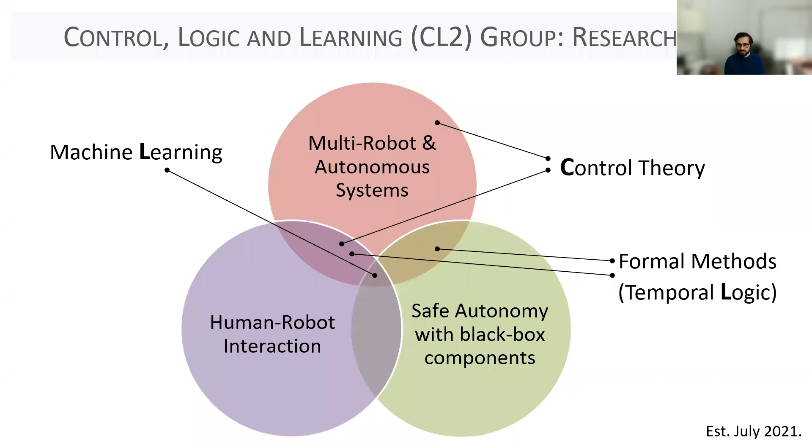That's another theme. As the name of the group suggests, the main tools that we use are control theory, a little bit of machine learning, and elements of formal methods, mostly temporal logics, which is going to be the focus of today's talk.

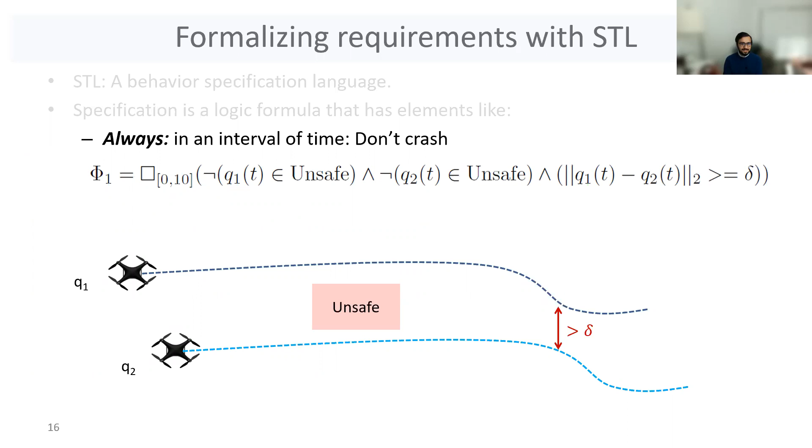Another one is the eventually operator, which says that an event should happen at least once in a given time interval. We can use that to encode requirements like these two drones having to reach a goal set within a bounded amount of time. So here I'd write phi2 as eventually over 10 seconds—again, the time interval could be anything, I've just used 0 to 10 as an example—I want quadrotor 1 to be inside the goal set, and similarly I also want quadrotor 2 to be inside the goal set within 10 seconds.

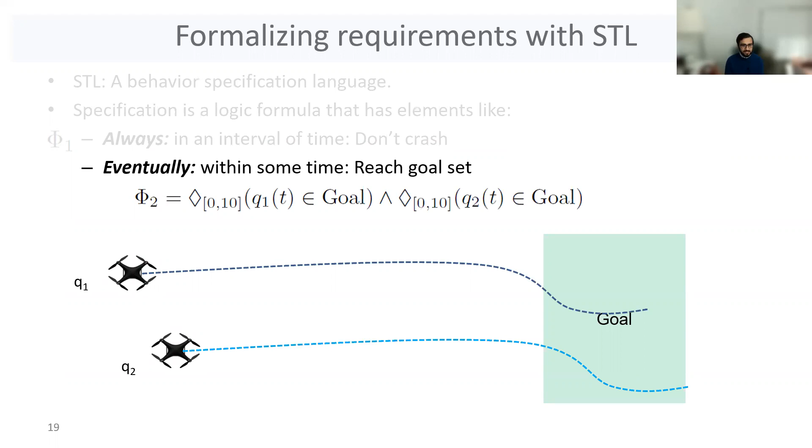We can also have if-then type reactive requirements in signal temporal logic. One example here is: eventually, I want quadrotor 1 being inside the goal set to imply that it's dropped package P1. Similarly for the second quadrotor.

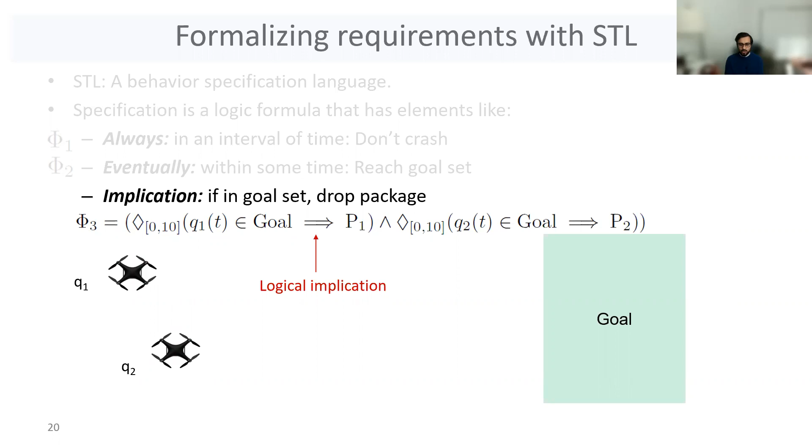We can combine these specifications together by either nesting them or using disjunctions or conjunctions. In this case, I just connect them using the logical AND, and come up with a two-drone package delivery problem, or a simplified representation of that. Here, all the temporal operators had a range of 0 to 10 seconds, so for this case we can say we have a specification horizon of 10 seconds—that is, I need trajectories of length 10 seconds before I can say whether or not the specification was satisfied. In the rest of this work, we'll only deal with problems or specifications that have a bounded horizon.

STL, of course, also works with unbounded operators, but that won't be the focus of this work.

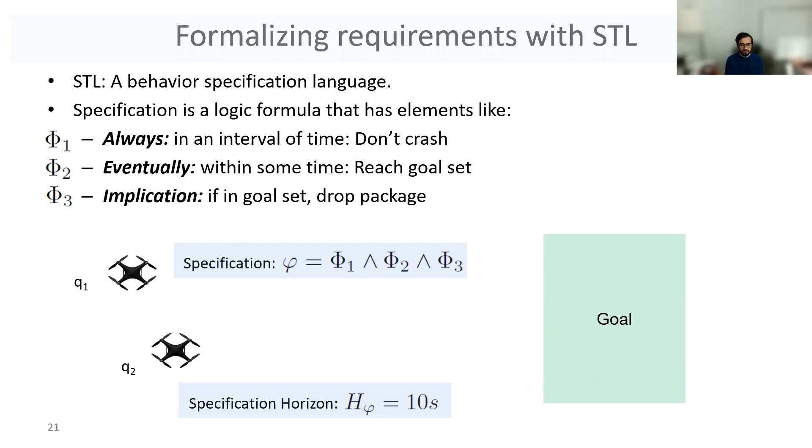So with that, we can move on to what the planning problem is. We've talked about formalizing mission requirements using signal temporal logic. Now the problem is, how do I generate trajectories that satisfy this specification?

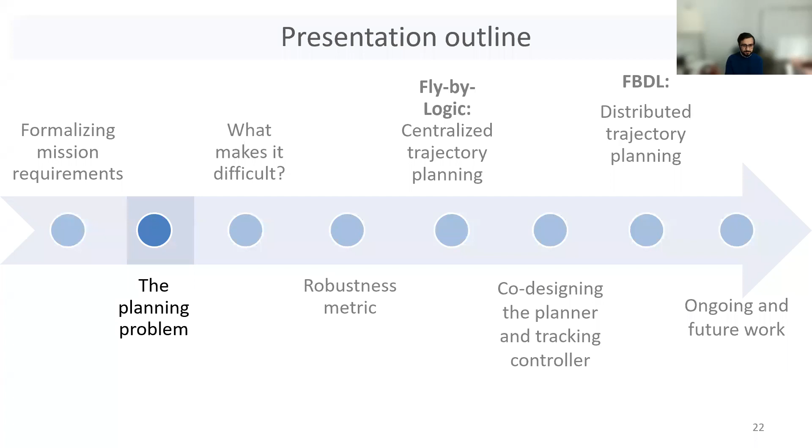A little more formally, an STL specification is a logical valued formula that takes in my trajectories over all my unmanned aerial vehicles, or all my drones, and maps it to a single Boolean true or false value. True if all parts of the specification are satisfied, otherwise it's false.

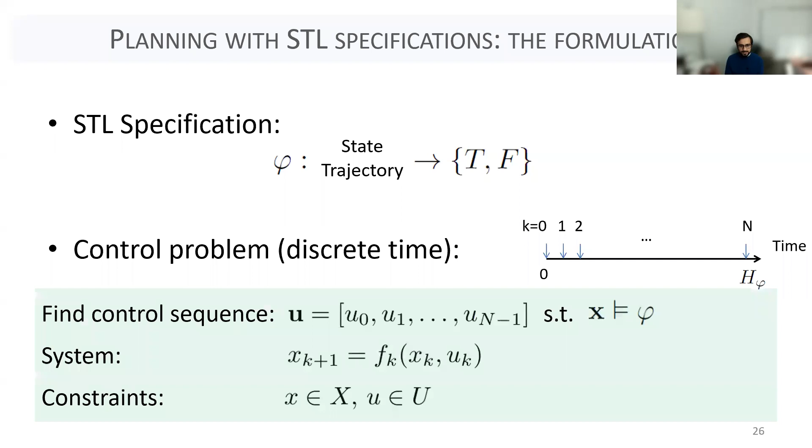The motion planning problem can be thought of as a finite horizon discrete time control problem, where I take my specification horizon and discretize it. Let's say for these 10 seconds in the previous example, I discretize them at 10 Hertz, so I have 100 time steps. Our problem then is to find a sequence of controls, or decision variables, for each of these agents such that they satisfy the specification.

So that's what this notation in the box is trying to say. Of course, we haven't formalized how, so that's going to be one of the main things we'll discuss in the rest of this talk. And we want to do this subject to system dynamics and constraints on the system, like bounds on velocity, acceleration, or the thrust that can be applied to these robots.

So again, given an STL specification, this is a high-level overview of the type of problem we want to solve in order to generate these trajectories that satisfy the specification.

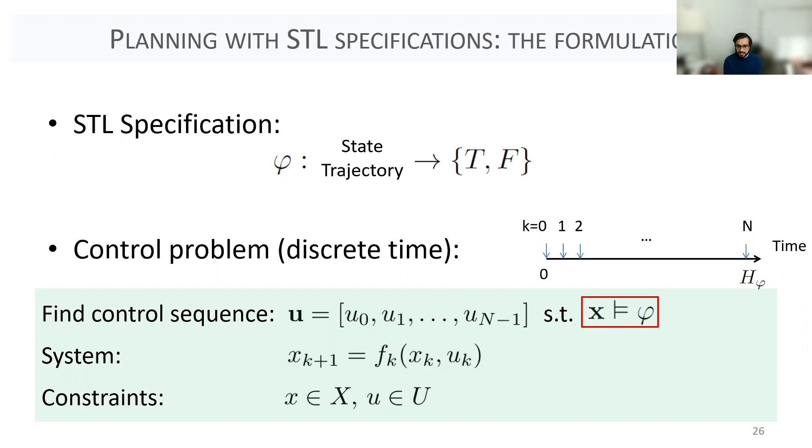Of course, we're not the first people to have thought of solving this problem. There's a lot of work that's already been done on it before I even got into the area. So I'll take a very coarse-grained look at some of the related work to see why this is a challenging problem. Disclaimer: this is a very coarse and slightly outdated view of the related work.

The most popular class of methods for control or motion planning with signal temporal logic specifications is to cast the problem into a mixed integer convex form. The idea is to introduce binary variables for atomic propositions, corresponding to events such as a state being inside a given set or not, and then come up with a mixed integer linear set of constraints such that satisfying those constraints also means you've satisfied the specification.

Two of the papers cited here have pretty much automatic ways of going from a specification to a mixed integer linear program. These approaches, being mixed integer linear programs, are double exponential in the complexity of the formula, so they do not scale very nicely. They also produce what we can call zero robustness solutions.

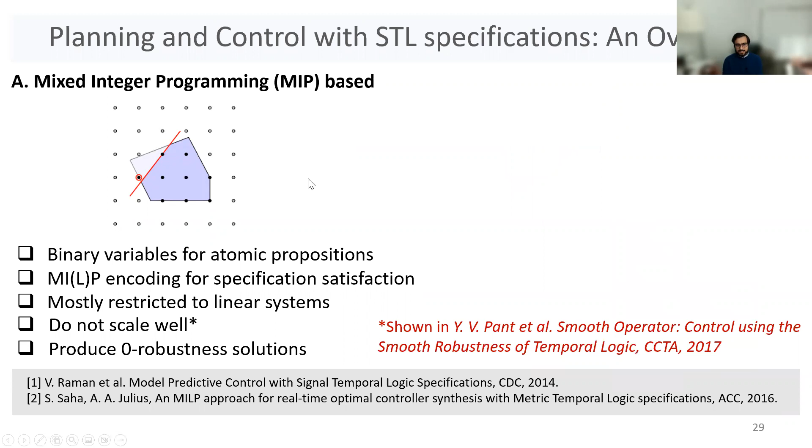The other approach mostly comes from the linear temporal logic side of things, but can also be applied to certain classes of discrete time signal temporal logic specifications. The idea is, instead of dealing with continuous dynamics like in the mixed integer programming approach, you abstract your dynamics on the workspace. Then, based on that discrete abstraction, you essentially turn the problem into one of doing a graph search.

The type of dynamics that can work with this are either simplistic, or you lose a lot, or you come up with plans that are very jagged and need smoothing on top of that. When it comes to signal temporal logic, the type of formula you can solve the problem for using these approaches is usually a restricted fragment. And these approaches also do not scale well, especially when you add more agents or a third dimension in the workspace, like we have for aerial robots.

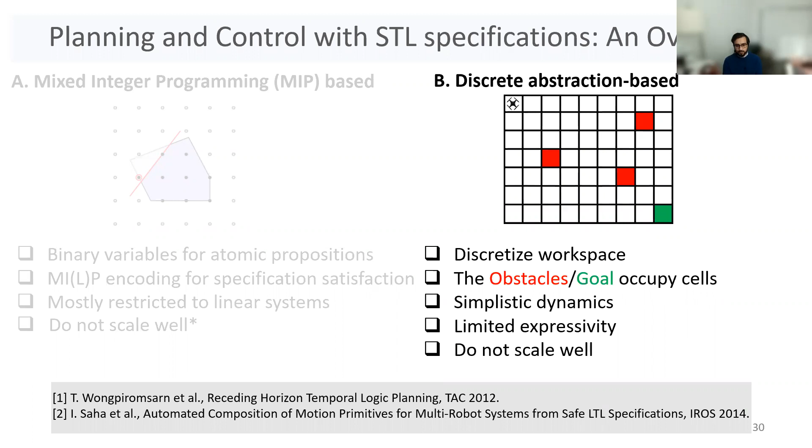So, the problem with most of these approaches is that they're combinatorial and do not scale very well, which is one of the main challenges we try to overcome with this work.

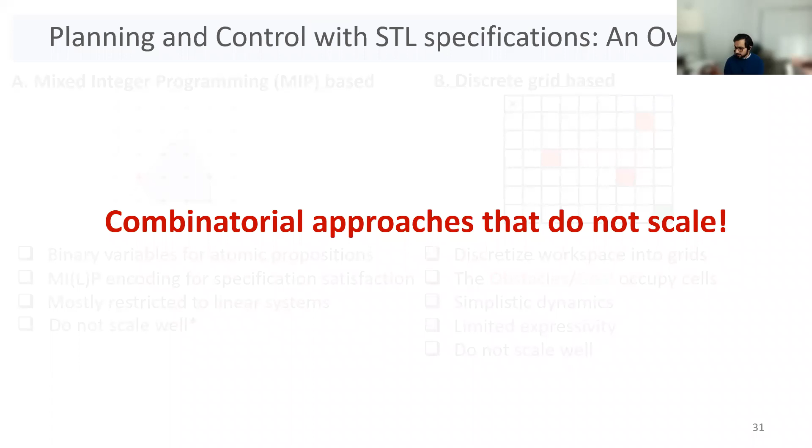I should also mention there are other methods I'm not going to talk about or compare with. For example, you can use reinforcement learning to solve this problem, turning satisfaction of an STL specification into essentially learning a policy via Q-learning. There are also approaches that turn this into a purely convex optimization problem, but a lot of the heavy lifting is done via projections of convex sets, which again do not scale nicely. There are also great approaches based on control barrier functions, but they rely on handcrafted barrier functions to some extent and are also restricted to certain fragments of signal temporal logic.

So, to overcome some of these limitations, our approach is that we want to go from solving a combinatorial problem—that is, we don't want to solve a mixed integer program or do a graph search—to solving a continuous problem. In fact, we want to use gradient-based optimizers to solve this problem.

And in order to do that, we'll introduce the robustness metric associated with STL specifications. The robustness of an STL specification was introduced by Georgios Fainekos and George Pappas in 2009. While an STL specification, phi in this case, takes in a state trajectory and gives you a Boolean outcome, true or false, the robust semantics of STL give you a continuous function rho of phi associated with your specification phi, which again takes in the same input—your state trajectory over all agents—but now instead of mapping it to a Boolean true or false, this mapping goes to the extended real line, so you have a continuous valued output.

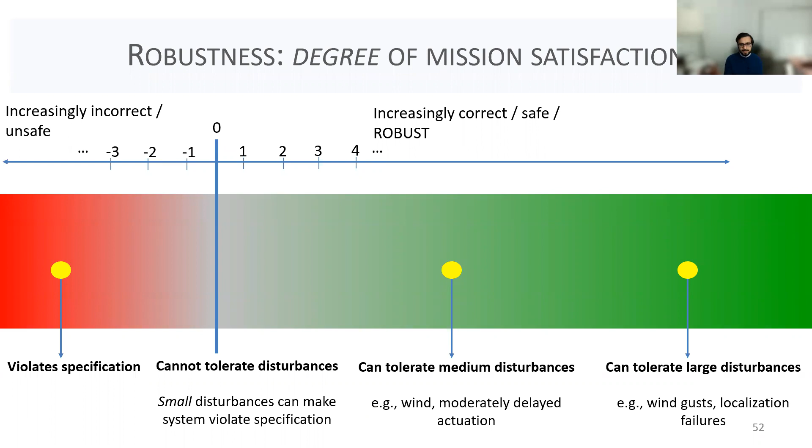So let's take a quick look at how we can build up this robustness function through one example. I won't go through the full recursive grammar of building it up. We'll take an example of a safety specification where I have a robot with position Q1, and what I want is that always, within 10 seconds, I don't want the robot to be inside the unsafe set U1 or inside the unsafe set U2. Let's say I'm given a trajectory of the robot like this for which I want to evaluate robustness.

So in this case, the robustness function essentially takes the following form: it's the minimum over time of the negative max of a signed distance metric that tells me how far away Q1, the position of the robot, is from the unsafe set U1 and the unsafe set U2.

The sign distance metric is such that if Q1 is inside the unsafe set, it will take on a positive value. Otherwise, it'll take on a negative value. Corresponding to the negation in the formula, we also have a minus sign in front of the max.

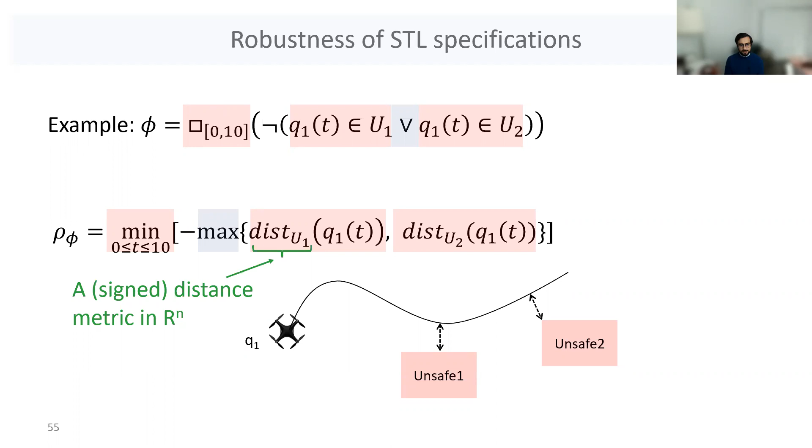In general, for a discrete time STL specification, where time is not in a continuous interval but over samples, the robustness function consists of the discrete minimum, the discrete maximum, and a distance metric. That's all you need to compute a robustness function.

In general, we can build such a function for any STL specification, and we can do it automatically using rules that I'm not going to talk about here today in the interest of time.

It also has the nice interpretation that, for example, for this trajectory, the robustness takes on a value R, which is greater than 0. That means that I can draw a tube of radius R, and the tube inherits the shape from whatever distance metric we use around this nominal trajectory.

All trajectories that remain inside this tube of radius R will satisfy the specification. In fact, this tube is more conservative—you could also have trajectories that go outside the tube and still satisfy it. But any trajectory that remains inside this tube is also going to satisfy this particular specification.

So just to summarize, what we have now is a robustness metric associated with the STL specification. It has a continuous valued output, and can be built automatically following the grammar of STL.

This leaves us with a very intuitive form of doing motion planning or control with STL robustness, which is: let's just maximize this robustness function, because we know if it takes on positive values, it means you've satisfied the underlying specification. In fact, that is what we do—we maximize robustness, but we had to jump through a few technical hurdles to do that first.

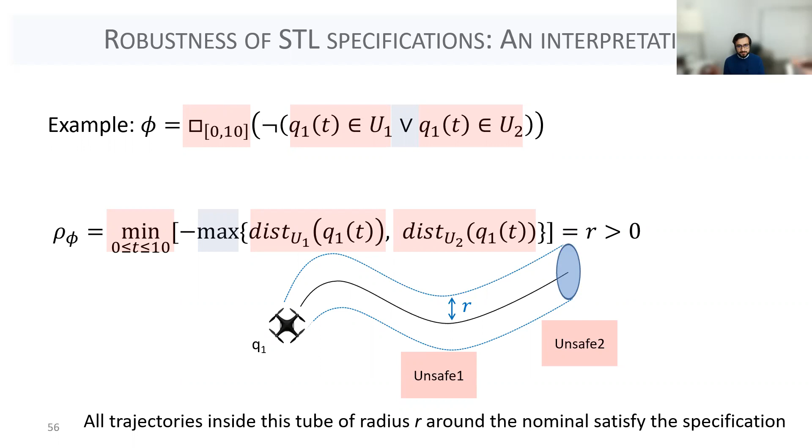So there is a minimum—why is the distance a positive value? Well, no, this is signed distance, I should make that clear. It's a signed distance, so it gets negative when you're outside the set, and positive otherwise. Okay, got it now. Yeah, okay, so it's—okay, thank you.

Yeah, and I should also mention we're looking at discrete time STL specifications. So even though my notation has a continuous minimum, it's really a discrete minimum over samples in time from 0 to 10 seconds. And yeah, the distance is actually a signed distance.

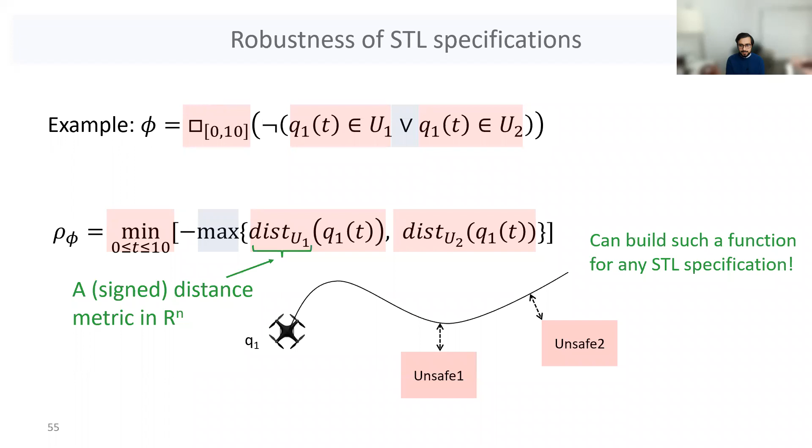In fact, we even look at something much simpler. Instead of looking at an actual distance metric, we just break down our sets into axis-aligned polyhedrons and look at half spaces—so we look at distance to a plane rather than signed distance. But I think that's a technicality that maybe doesn't matter too much here. Thank you for the question.

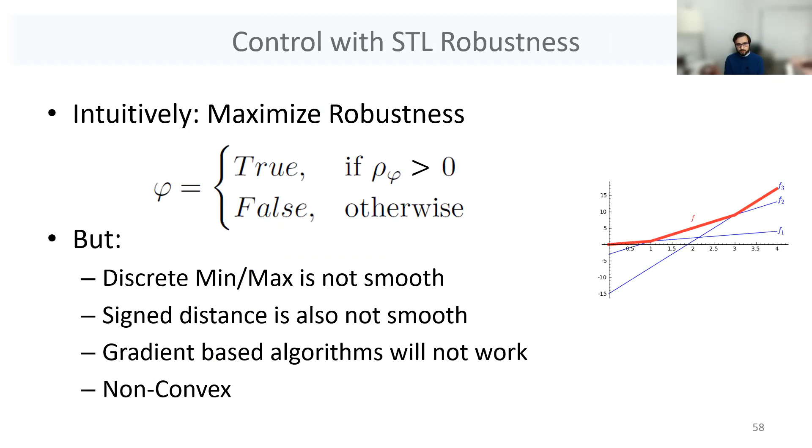So we have this robustness function, and a smooth approximation of it which we can maximize through gradient-based methods. That is what we do in our method called flyby logic, which generates trajectories for multi-agent systems in a centralized manner. Flyby logic is a predictive optimization-based motion planning algorithm.

It's essentially an optimization for maximizing smooth robustness through waypoint selection, where smooth robustness is denoted by rho tilde of phi. Smooth robustness has the property that if I plug in my trajectories into that function and it takes on a positive value greater than some epsilon, it means the underlying specification phi is satisfied.

My optimization is going to be only looking at some coarse-grained waypoints to be selected. So the optimization isn't going to be over low-level controls or over continuous trajectories. It will only be over waypoints.

Through this optimization, we ensure that we aim to get two guarantees. One is continuous time satisfaction of the specifications. So even though we deal with these waypoints, which are orders of seconds apart in time, we still want continuous time satisfaction of whatever's happening between these particular waypoints. We also show kinematic feasibility of the resulting trajectories.

I'll set up this problem. I'll mostly talk about it in the context of a single agent, but if I have multiple robots, I just have copies of the variables and constraints I'm going to talk about now. We start off with, say, some given initial positions and the workspace that you'll be operating in on the map.

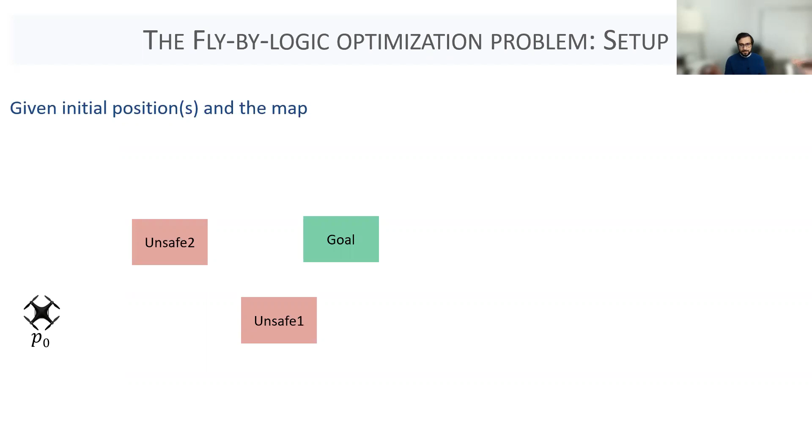The optimization variables for this flyby logic are going to be N+1 waypoints per UAV. These waypoints, P0, P1, P2, and P3, are in R3, so they're position waypoints, and they're uniformly apart in time. That is, it takes my robot TF seconds to go from P0 to P1, from P1 to P2, again TF seconds, and so on. You can think of TF as, for example, being 1 second if you want to put a number to it.

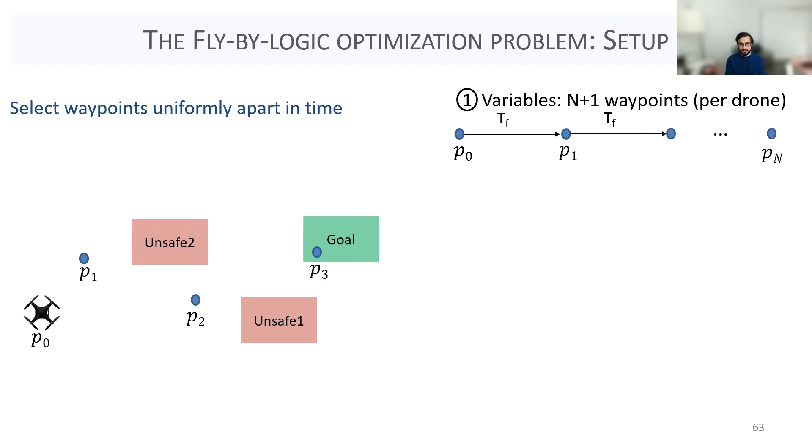Now, I have a specification horizon, let's say of H. So even though capital N is a design choice, I should pick at least enough waypoints N such that the total flight time is greater than the specification's horizon, so that I can generate a trajectory of enough duration to be able to evaluate the specification. That's one design consideration I should be aware of.

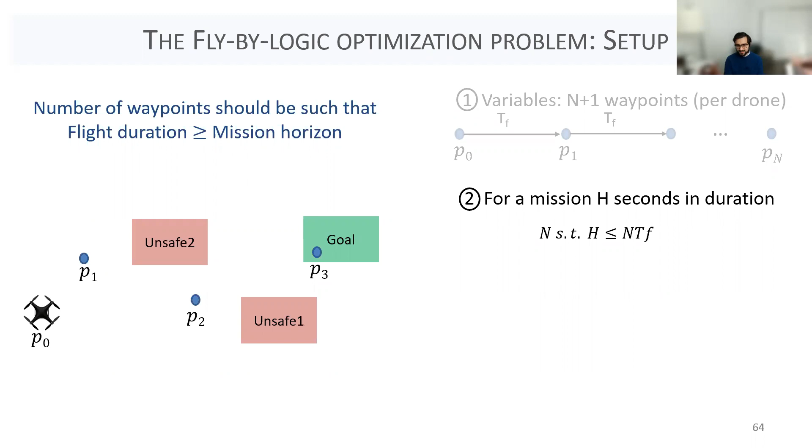Now, just reasoning about these waypoints alone is of course not enough. We are talking about satisfying an STL specification, and we want to do that for these trajectories that connect these waypoints. So in order to do that, we're going to restrict the ways in which we can connect these waypoints successively, by connecting them via jerk minimizing splines.

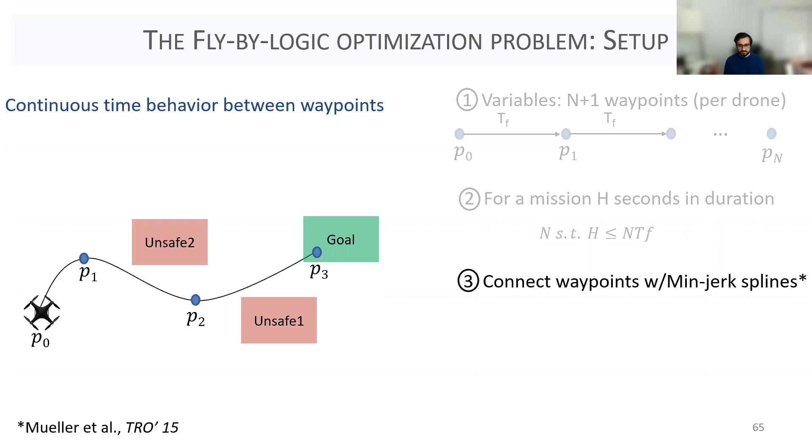For multi-rotor aerial robots, these jerk minimizing splines have a very nice closed form expression. If I'm connecting a waypoint P0 with a waypoint PF, my jerk minimizing spline Q star, in each dimension XYZ of my workspace, has the following form for position, velocity, and acceleration. You can see it's going to be a quintic spline in position, and then derivatives of that for velocity and acceleration. These parameters, alpha, beta, and gamma, turn out to be nice and linear in my variables of interest.

So my variables of interest are P0, let's say a waypoint that the robot is at, the next waypoint PF, the initial velocity of the robot V0, and maybe the initial and final acceleration. In this particular case, we restrict ourselves to trajectories that have a zero acceleration at the waypoint, so we don't worry about these particular acceleration terms.

But long story short, what connecting the waypoints via jerk minimizing splines does for us is that we have these continuous time trajectories connecting the waypoints as nice linear functions of my variables of interest, parameterized by time, since they're quintic splines in T for position. Similarly, for velocity and acceleration, they're also linear functions of my variables of interest.

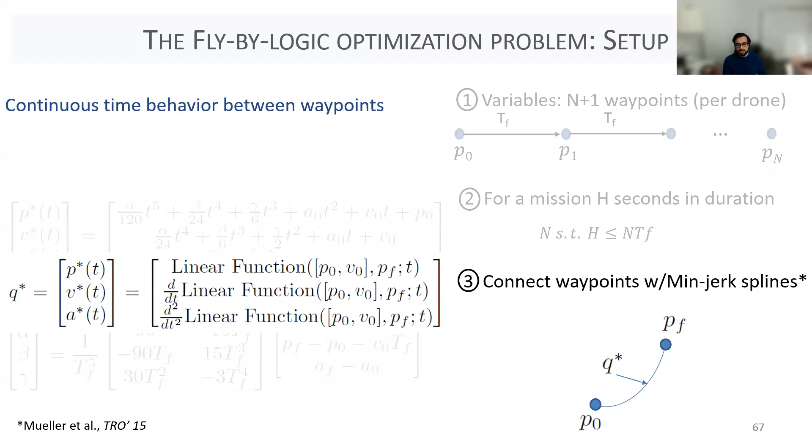Now, I want to throw this to an optimizer. Having a continuous trajectory, while it's great for evaluation, is not good for optimization. So what we're going to do next is discretize our continuous trajectories at some high rate.

If TF was 1 second, you can think of dt as being 1/20 seconds, or getting samples at 20 hertz. So if I have a continuous spline connecting P0 to P1, I'll have 20 samples between that. Similarly, I'll have 20 discrete samples between P1 and P2, and so on.

Leveraging the fact that minimum jerk splines have a nice closed form expression, I now have a closed form expression for each of these samples shown by the red stars, these discrete points along the trajectory. They're nice linear known functions of the preceding and succeeding waypoint, parameterized by which sample they are along the trajectory. So if I have a sample star subscript I between P1 and P2, it's purely a linear function of P1 and P2, and which sample it is, whether it's the third or fifth sample along this trajectory.

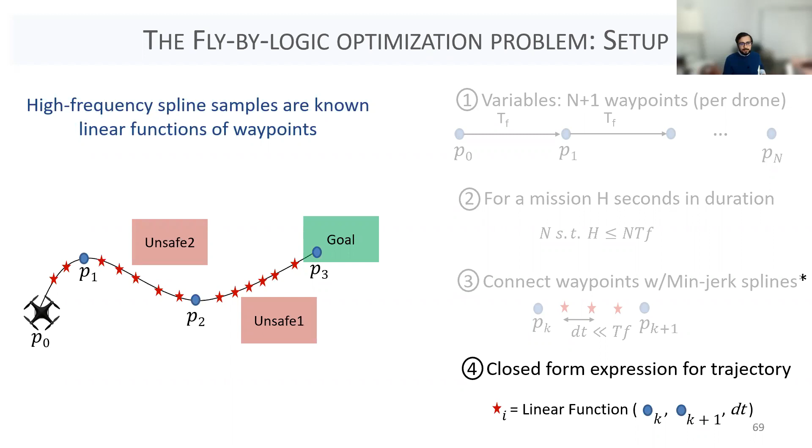Through this construction, optimization variables remain very few. We have position waypoints, P0, P1, and so on, for each of my capital D UAVs. And then I have a nice linear representation of the jerk minimizing spline trajectory connecting these, discretized at a high rate. So we've essentially represented the entire trajectory at a high rate using very few variables. This allows me, if I move my waypoints around, to know through my closed form linear function how the resulting trajectory connecting these in discrete time is also going to move around. That's one of the key constructions we use in the optimization for Fly-by-Logic.

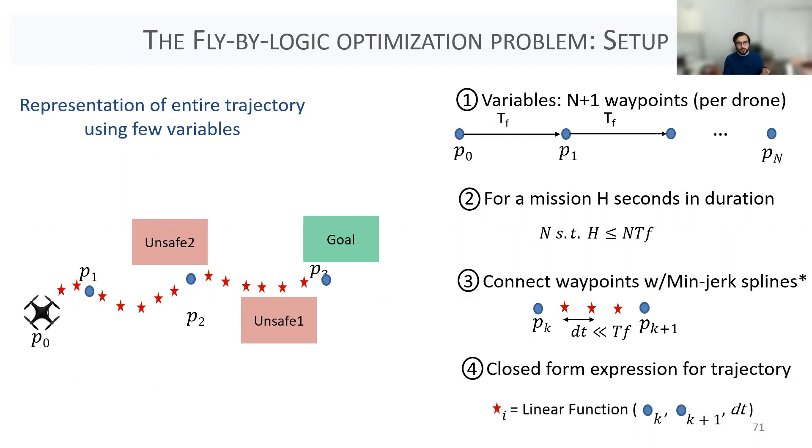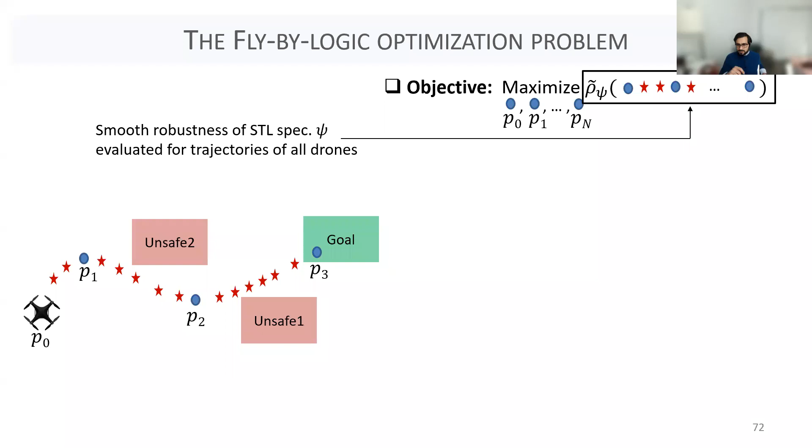So now we can talk about the optimization itself. The optimization is that we want to maximize the smooth robustness of an STL specification, where the smooth robustness is a continuously differentiable function of these samples of the trajectory that I have. I want to maximize that along the full trajectory, not just the waypoints, but the waypoints and the red stars, the higher frequency samples along the jerk minimizing splines, over my optimization variables, which are these capital N waypoints for each of the drones.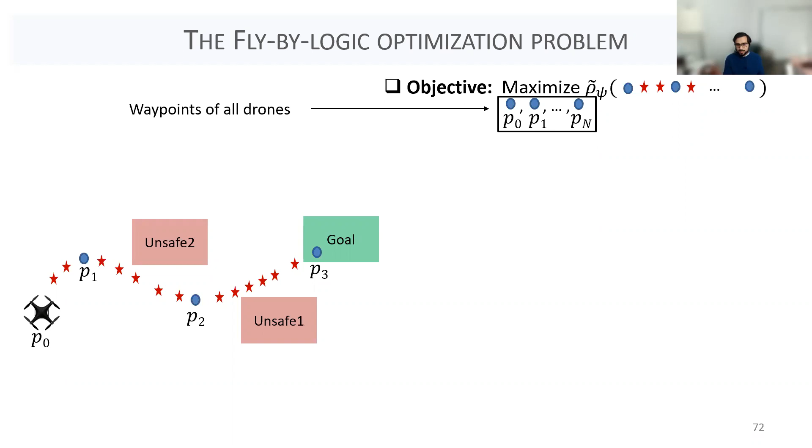I'm writing this down just for a single drone to keep the indexing simple. But if I had capital D drones, I would have capital D copies of these waypoints, and similarly the trajectory would also be longer, would have more elements to it. So that's the objective over here.

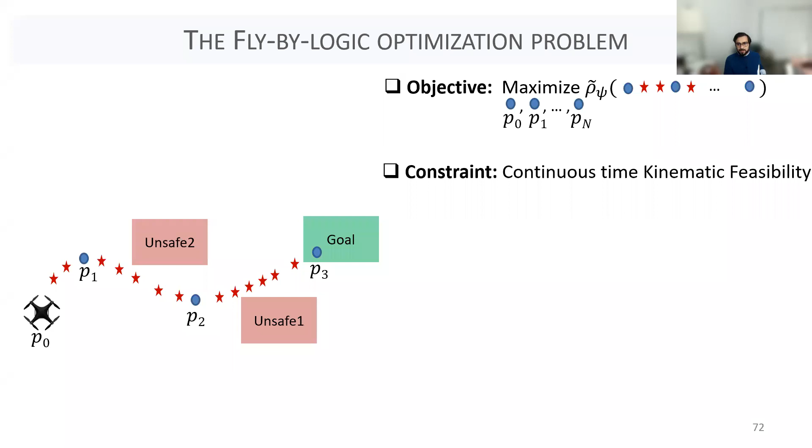The constraints are that we want to do this subject to continuous time kinematic feasibility. That is, I want to generate trajectories such that their velocities and accelerations are within predefined bounds, so that a low-level controller will be able to track them nicely. And I want this to hold for all times in my specification horizon. The problem here is that if I want to throw this directly to an optimizer, this is an infinite number of constraints.

Even if I go about discretizing it and coming up with a constraint for each of these red stars, that would result in a high number of constraints. It would also be conservative, because I would have to think about what's happening between these samples, think about the Lipschitz constant of my spline, and then subtract that from Vmin and Vmax.

However, it turns out that for this particular problem, we could find constraints purely on my optimization variables, which are waypoints. I could find linear constraints on successive waypoints, as shown here. These functions LB and UB, with the subscript V and A for velocity and acceleration, are linear functions of the velocities with which we were at these particular waypoints. And then I have these nice linear constraints.

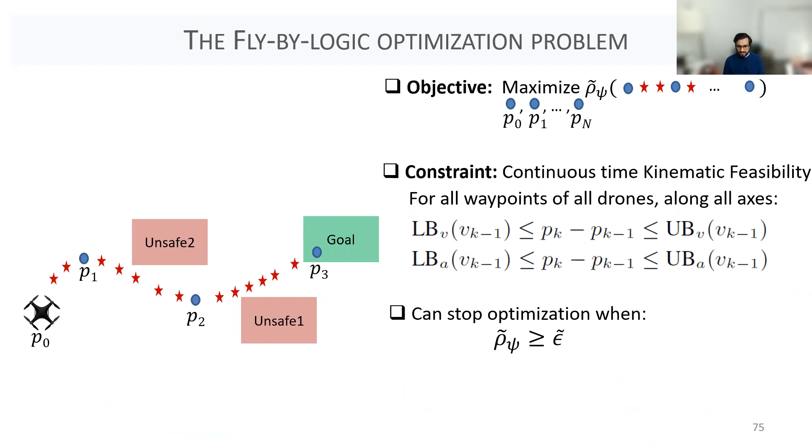With this optimization, we can stop when the objective reaches a particular threshold epsilon tilde, which is a positive value. One of the results in our papers was that we can pick this epsilon tilde such that it ensures continuous time satisfaction of the STL specification. So even though I'm doing robustness maximization on a discrete time trajectory, if the robustness is high enough, it also ensures continuous time satisfaction. It's a simple argument that gives the proof of this corollary.

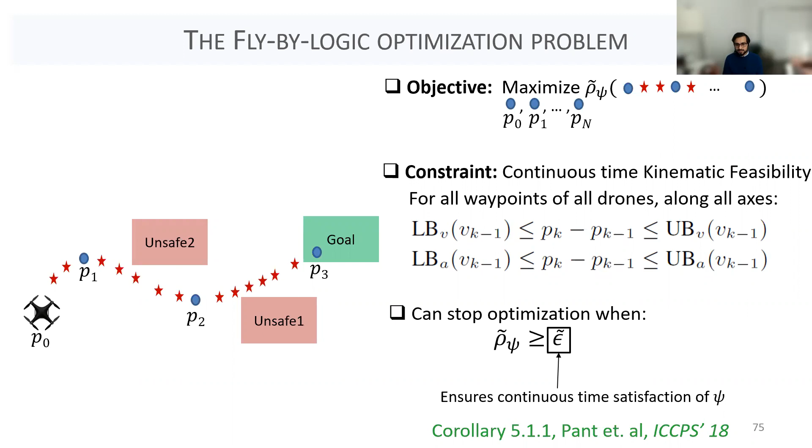One thing to think about is that robustness is in general a non-convex optimization, so that does keep the problem challenging. But what makes it slightly easier is that we have few variables and very few constraints, which are all linear in our variables of interest. So we can throw this to an off-the-shelf gradient-based optimizer.

Putting it all together, if you solve this optimization, we first get the guarantee of continuous time satisfaction of the specification, which is one of the things we set out to get. We also have kinematic feasibility of the resulting trajectories, just by finding a feasible solution to the optimization.

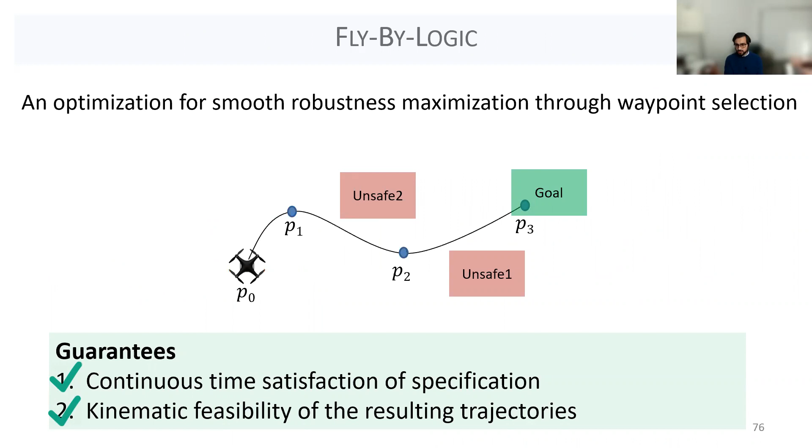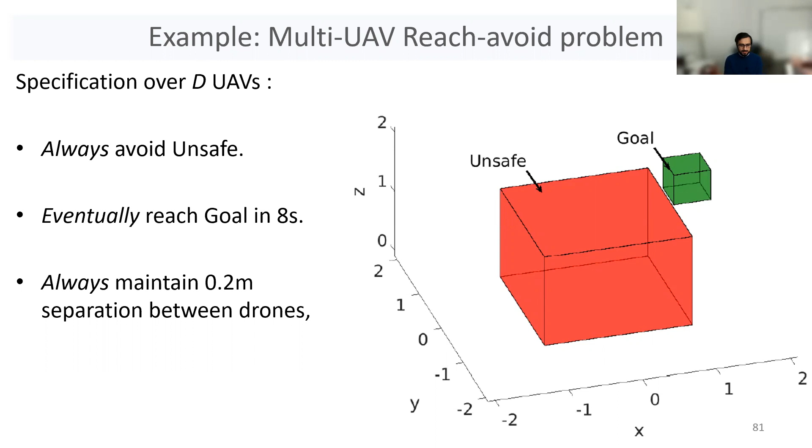With that, we can move on to some experimental results to see how this optimization works. As a first problem, we'll look at a multi-UAV reach-avoid problem, where I have to always avoid an unsafe set. My UAVs, there are capital D of them, have to reach the goal set within a given time interval, which is 0 to 8 seconds in this case. The UAVs should also be at least 0.2 meters apart from each other so they're not crashing into each other. I can write this down as the following STL specification using just the always and the eventually operator.

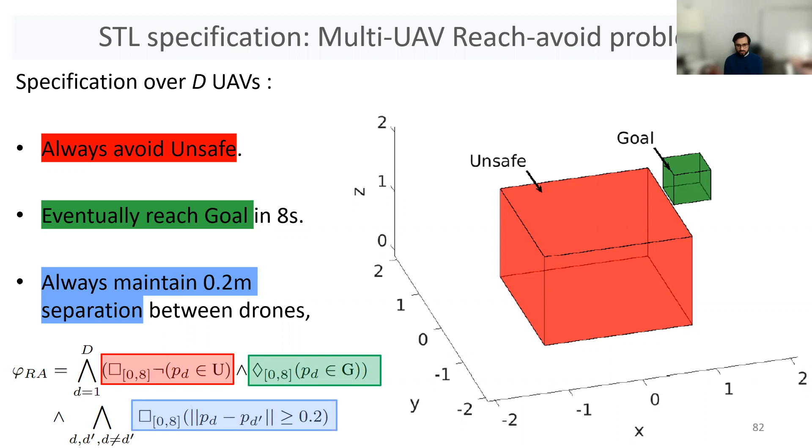And then we can essentially use all the construction in Fly-by-Logic. What we have here is an experiment with 8 Crazyflie quadrotors. I think in this case the horizon of the specification is just 6 seconds.

Through our method, we can generate trajectories where all of the robots make it inside the goal set, then head out, letting the others enter. The fact that they're trying to go as deep inside the set as possible while staying far away from the unsafe set is because they're trying to maximize robustness. So we're not getting these zero robustness trajectories where they just touch the edge of the unsafe set or the edge of the goal set.

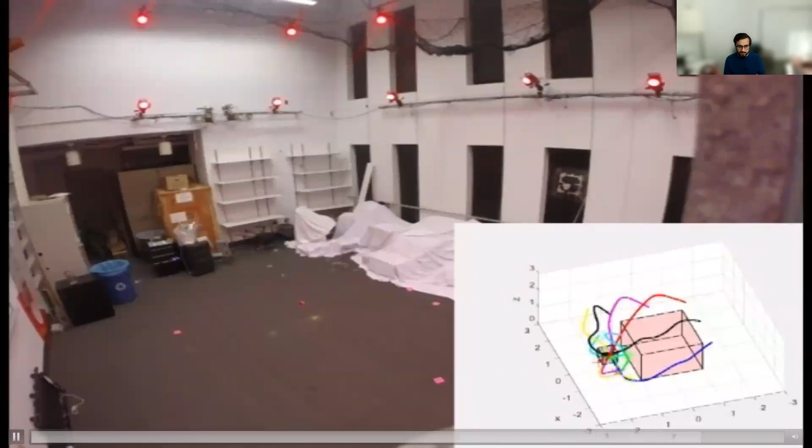One of our main motivations was to come up with a computationally tractable method. So even though it's a non-convex optimization, we see that it scales nicely as you increase the number of drones. The amount of time it takes to find a satisfying solution scales almost linearly with the number of drones. The problem is still, of course, NP-hard, so this is just more of an empirical artifact of the kind of method we have employed.

The mixed integer linear programming based approach, BluSTL, is very fast when you have one drone, but as you start to add more agents, it scales very poorly. It does work for up to 6 drones, but I'm not going to show those results here.

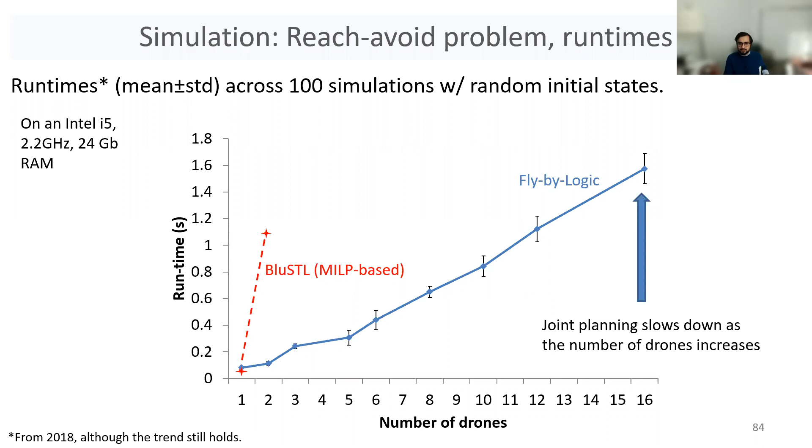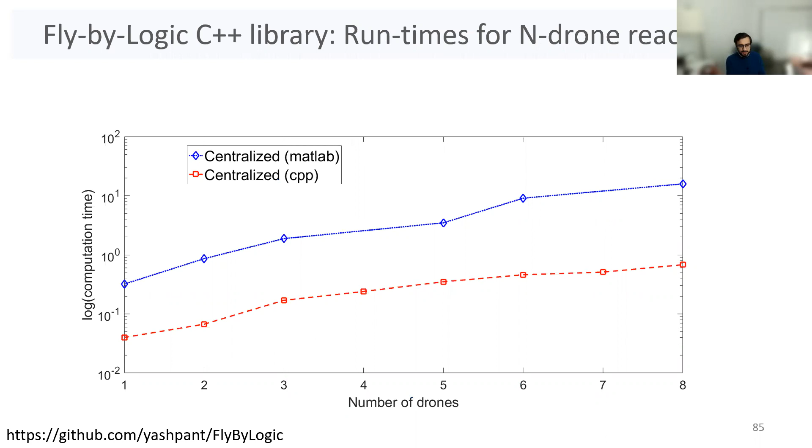One thing we noticed was that as you plan together for all of these agents, you do see a slowdown in compute time. This motivates why we want to do this in a decentralized manner, which we'll talk about later. We also implemented all of this in a C++ library with an easy to use API, the code for which you can find on this link. It's at least one order of magnitude faster than the results in the previous slide.

We're not just limited to reach-avoid problems. We can handle the full grammar of STL. This is one example where we use the until operator in signal temporal logic. Here we do the planning in R2. We have 4 robots shown here, one moving unsafe set shown with the red ellipse, and 5 static unsafe sets, which are these red boxes. These robots have to all reach the goal set without crashing into each other, into the moving obstacle, or the static ones. The additional requirement is that this robot in blue should not get into the goal set until the robot in pink does.

So for something like this, we can throw it to Fly-by-Logic, and it generates the following trajectories. You see that the first 2 robots made it in. The pink robot then makes it into the goal set, which is in green, before the blue robot does. The optimization naturally generates this interesting loiter-like pattern for the blue robot, where it picks these 3 waypoints close to each other and essentially flies a time-wasting pattern while making sure it's staying far away from all the other agents. So again, Fly-by-Logic can handle the full grammar of STL.

One limitation I should point out is that we need to know what the moving obstacle is doing perfectly a priori. Otherwise, we can't apply our method.

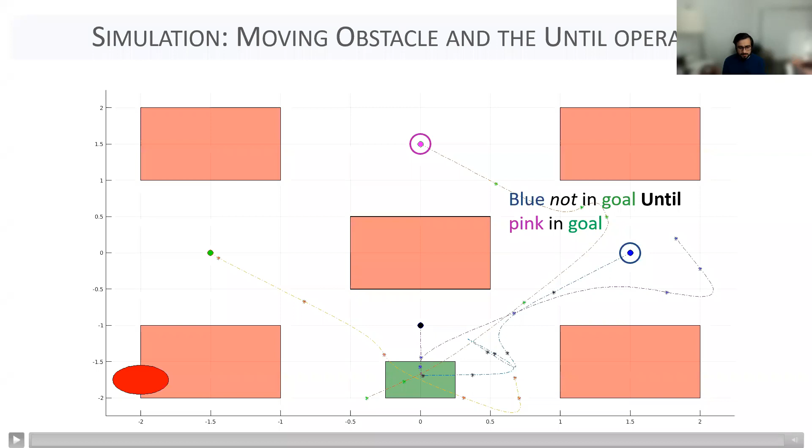So we talked about Fly-by-Logic, which generates trajectories. Next, we want to design the motion planner and a tracking controller so that you can track these trajectories with a bounded tracking error.

This is work that was published in ACC 2021 and was done jointly with folks at the University of California at Berkeley. The idea is that we want to have a co-design architecture where we use Fly-by-Logic as the trajectory planner. It's going to take in the STL spec, the UAV kinematics and the kinematic constraints. It's going to generate trajectories, but it's going to take in an additional input, this dashed line going from a tracking controller that tells you about the worst case tracking error. So the trajectory planner is going to be aware of the worst case tracking error of a controller.

We'll also synthesize a possibly nonlinear feedback controller that accounts for the full nonlinear UAV dynamics and also respects state and input constraints. One more point is we have a proof of bounded tracking error with this as well. So that's the third thing that it's going to do.

The first component is Fly-by-Logic, which we can think of as doing motion planning in the kinematic space, through generating these jerk minimizing trajectories. We're essentially finding a solution with the following kinematic model, where the states are positions, velocities, and accelerations, and the inputs are jerks in the 3-dimensional space, X, Y, Z.

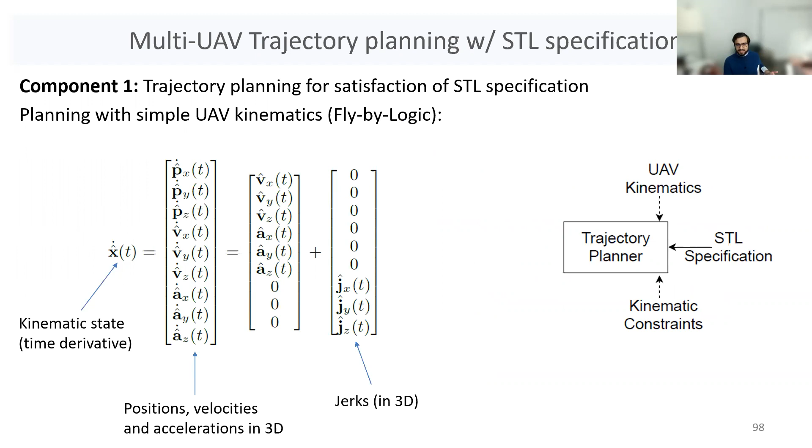The second component is a robust trajectory tracking controller that takes into account nonlinear UAV dynamics. It has 8 states, and it's a nonlinear function with the simplification that we set the yaw and its derivatives to be 0. This controller takes in the UAV kinematics and the UAV dynamics, and uses that to compute the error dynamics, where the error E is the dynamic state X minus a mapping of the kinematic state X hat through this matrix G. For this particular system, the error dynamics E dot turn out to be nonlinear, but they're at least control affine, which allows us to use existing approaches for controller generation.

And we'll synthesize a controller that minimizes the tracking error subject to constraints on the input U.

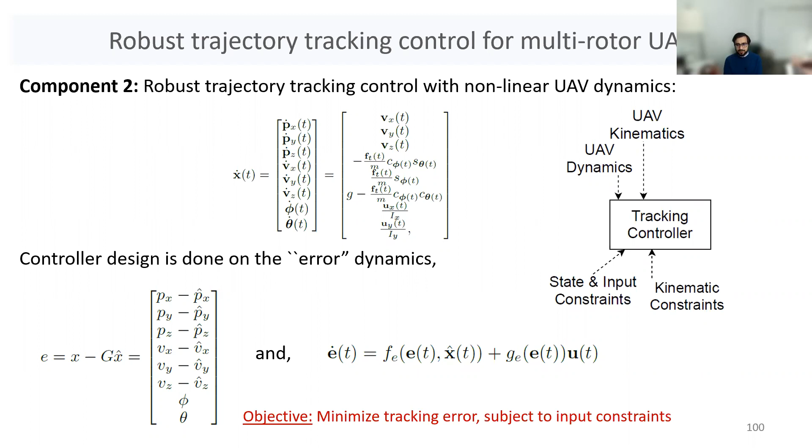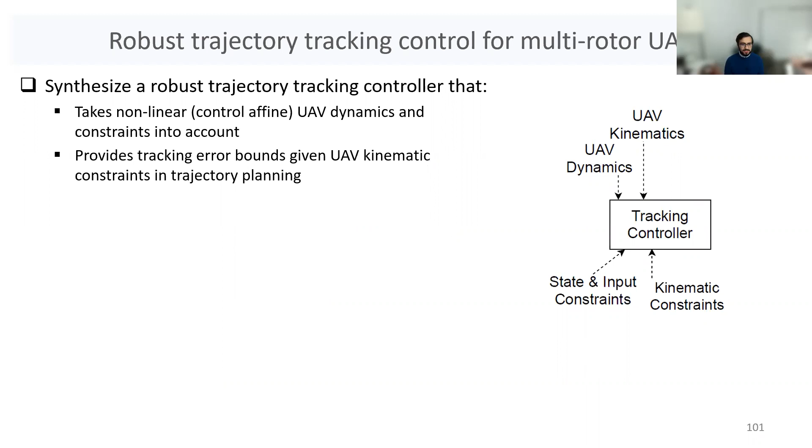The constraints on the state are taken into account by the kinematic constraints anyway, so we don't need to worry about them too much. One of the key contributions of this work is to synthesize this robust controller that can do all of this, and the way we do it is by solving a sum of squares optimization.

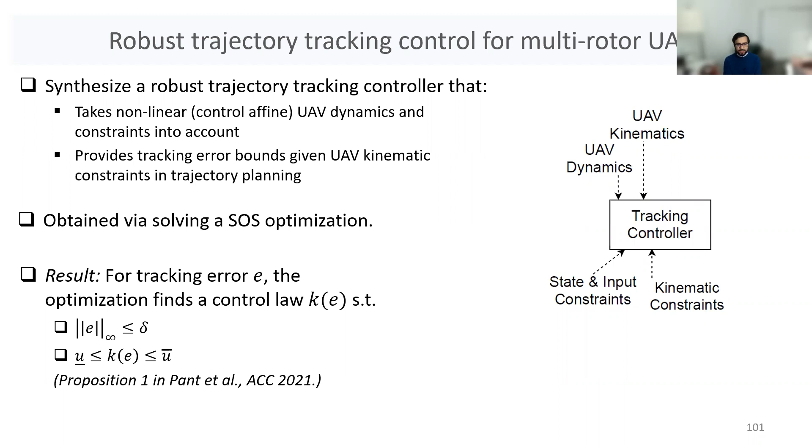I don't have time to get into the details of that, but the guarantees of this construction are that we can find a nonlinear feedback control law K of E, where we have an ellipsoidal bound on the worst case tracking error, which can also be turned into a hyperrectangular, or infinity norm, bound as shown here. It also guarantees that the control value will be within its predefined limits.

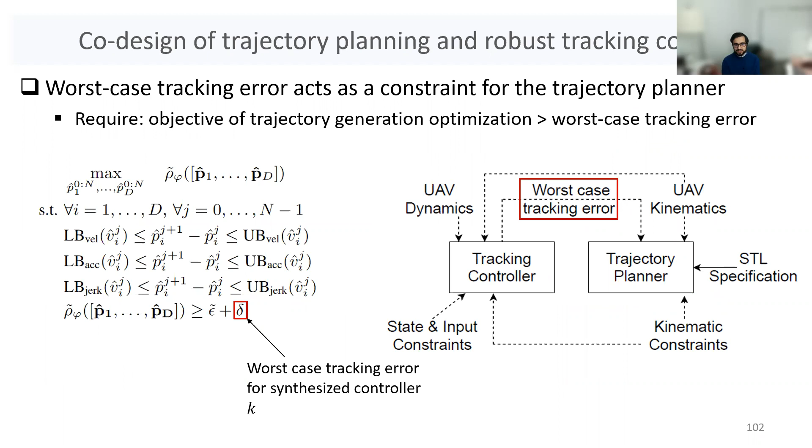This control bound delta can feed in as an input to the Fly-by-Logic optimization, which we slightly modify to also take into account the jerk kinematic constraint, so that the jerk is now also bounded, which we did not have in the previous formulation. We want our smooth robustness value to be greater than a threshold that includes our worst case tracking error. The main result is that if you can solve the non-convex optimization and get a high enough objective value, it means you have satisfied the specification in continuous time.

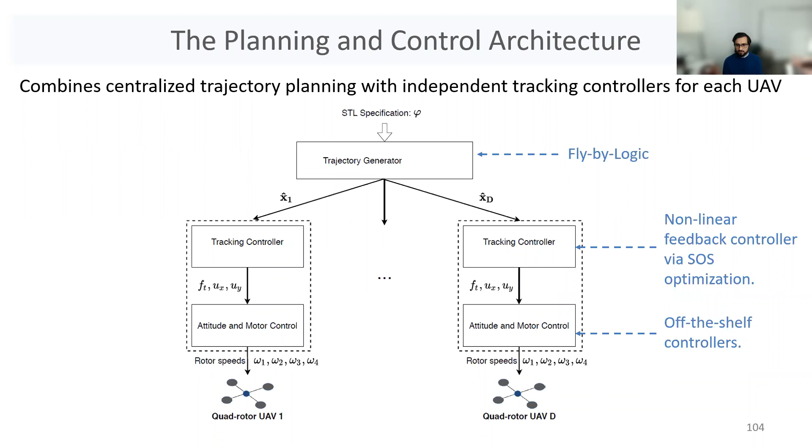And with your controller K of E, you won't have a tracking error that makes you violate either your constraints or your specification. The overall planning and control architecture looks like this: a centralized trajectory generator, a tracking controller which is a nonlinear feedback law via sum of squares, which feeds into an off-the-shelf attitude controller for these UAVs.

I'll go over one case study where we have 4 UAVs, think of them as doing 2 missions each, in teams of 2. UAVs 1 and 2 have to cycle between zones 1 and 2 every 5 seconds.

UAVs 3 and 4 should visit a delivery region, shown in green, for the first 10 seconds, then go to the base for the next 10 seconds. They should do this while not crashing into each other, while avoiding an unsafe set, and so on. I can represent this mission in the following specification. It's not as bad as it looks - it's actually a relatively straightforward specification.

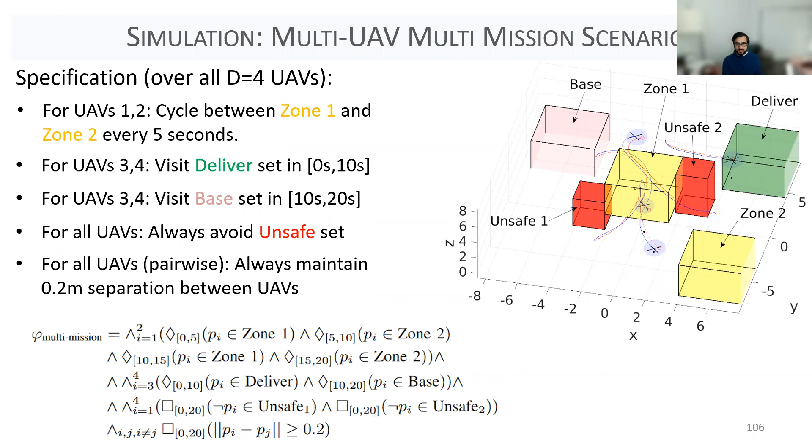Using our co-design approach, we can both generate trajectories and track them such that you satisfy the specification using the full nonlinear dynamics of the UAVs. I have essentially 2 3D views and a top-down view. In blue, we have the actual trajectory. The red dot shows the next state that the controller is trying to track, or the reference for the controller.

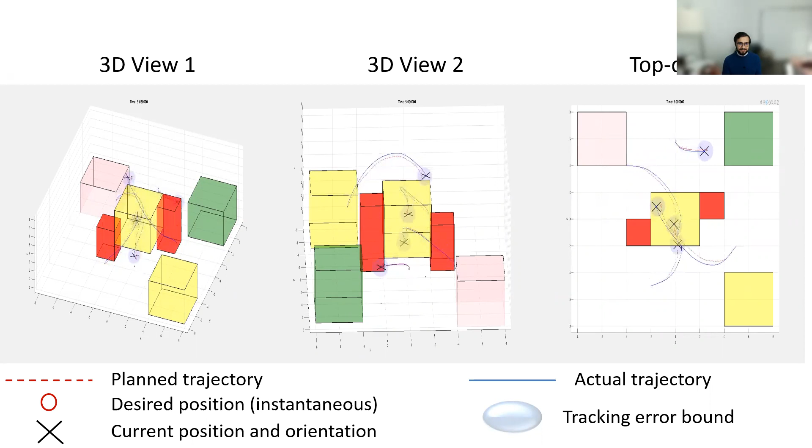The ellipsoid is the worst case tracking bound, being updated in real time as a function of the error state. You see that you do indeed have 2 robots circling between these yellow sets without crashing into each other. The other 2 go inside the green set and then inside the light pink set, which you can barely see.

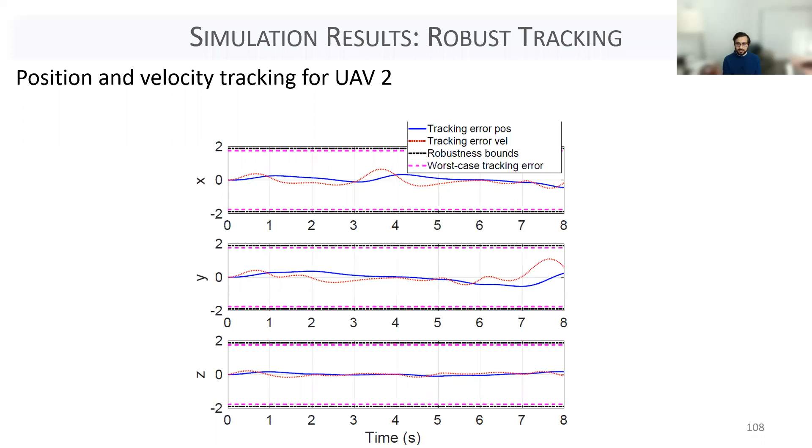I'll briefly, in the last 5 minutes, talk about the distributed trajectory planning approach - I'll skip the details. The idea is again the same as Fly-by-Logic: you have an optimization over waypoints for these robots, where you want to maximize the smooth robustness subject to these constraints. But now you want to do this in a distributed manner, where each robot or group of robots makes its own decision while communicating with each other and being cooperative.

So the high-level idea is that we divide our entire fleet of robots into groups. Each group, or each UAV within a group, in parallel solves convex subproblems associated with maximizing the robustness. The groups then communicate their solutions with each other, and repeat this process until convergence.

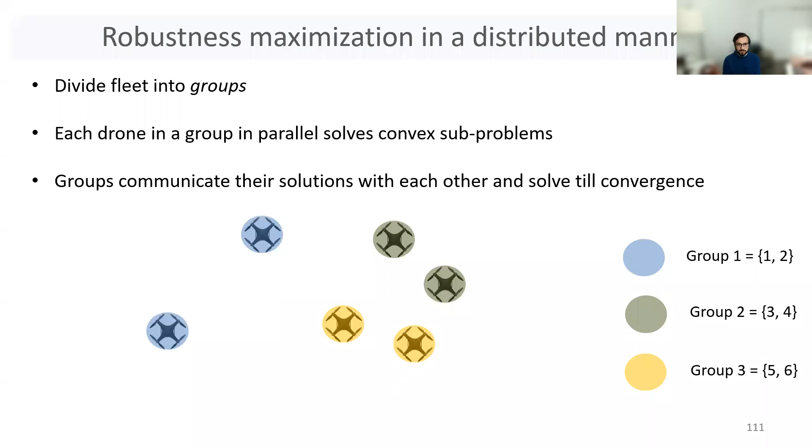There's different ways in which these groups can choose which group goes first in the algorithm and so on. But yeah, the details are formalized in the paper. I won't talk about that too much in the interest of time.

I'm going to skip the details, but on the inside, we're solving a nice quadratic program that corresponds to doing block coordinate gradient ascent on the smooth robustness of STL. These block coordinates are essentially the variables associated with a particular UAV. So you go in one direction in the space associated with the variables of one UAV, then move on to another UAV, go in the other direction associated with its variables, and so on. Anyway, you can skip these particular details.

One of the main guarantees is that this algorithm is going to converge to a stationary point on the smooth robustness, which may not sound like much. Just converging to a stationary point doesn't really give you any strong guarantees. But even having convergence for a distributed algorithm that can handle the full grammar of STL, our work was the first that actually did this.

Second guarantee is that if the algorithm converges to a stationary point with a high enough STL robustness value, then it means you have generated trajectories that satisfy the spec and are also kinematically feasible. In fact, you can also combine this with the controller through the co-design process and get dynamic feasibility or bounded tracking error as well.

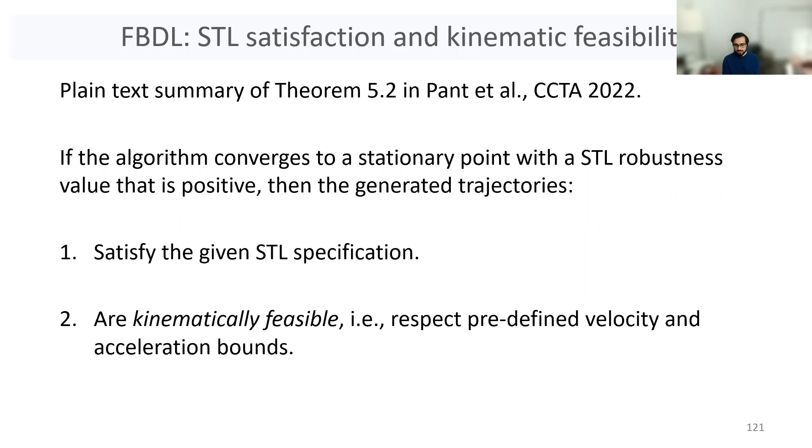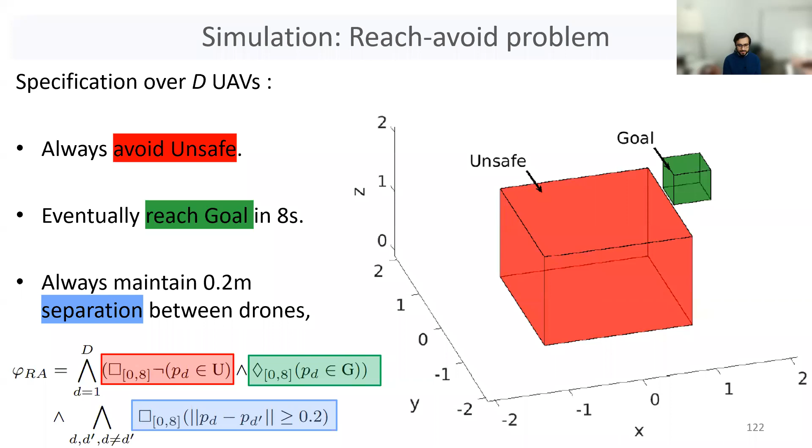But the interesting thing is when we do a comparison of this to the centralized flyby logic approach. We're going to do this with increasing number of UAVs going from 2 to 8. First we look at the amount of time it takes to find a satisfying solution, or a set of trajectories that satisfy the underlying STL spec. Turns out that on average, the distributed approach is faster.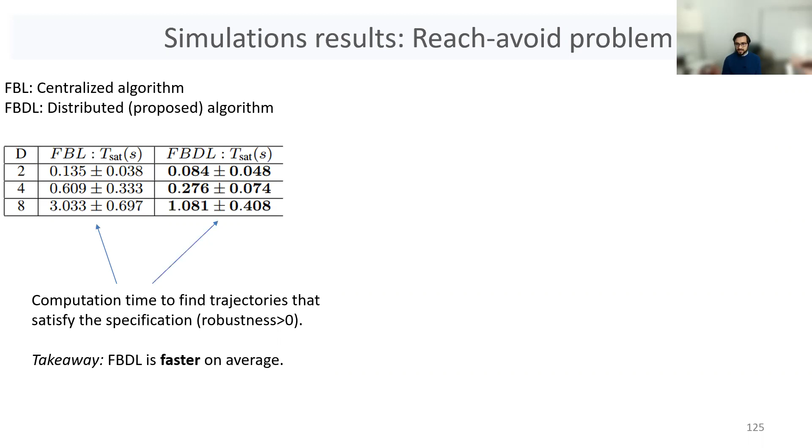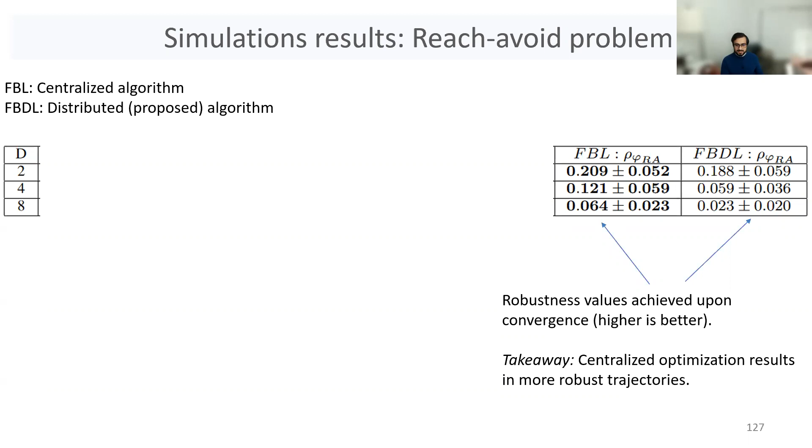When you let it run to convergence, the distributed approach is faster as well, but this doesn't actually mean much, because when you look at the actual robustness values obtained from these trajectories—and with robustness values, higher is better—it turns out that the centralized approach is doing better. If you look at the papers and their convergence theorems for either of these and compare them, it's not a surprising result, because you do expect better convergence for the centralized approach. So the takeaway is that centralized optimization does do better in terms of robustness, but the distributed one is faster, and it can handle the full grammar of STL.

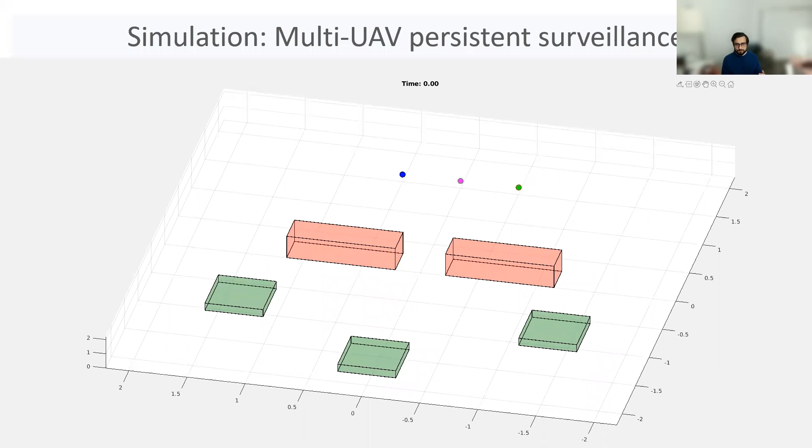Over here, we have a reach-avoid problem where one drone should not get to the goal set until the other drone does. I'm going to skip the simulation in the interest of time. We can also nest operators—we can have an eventually-always or an always-eventually operator, as long as you have a bounded horizon for the specification, and our method can also solve for that.

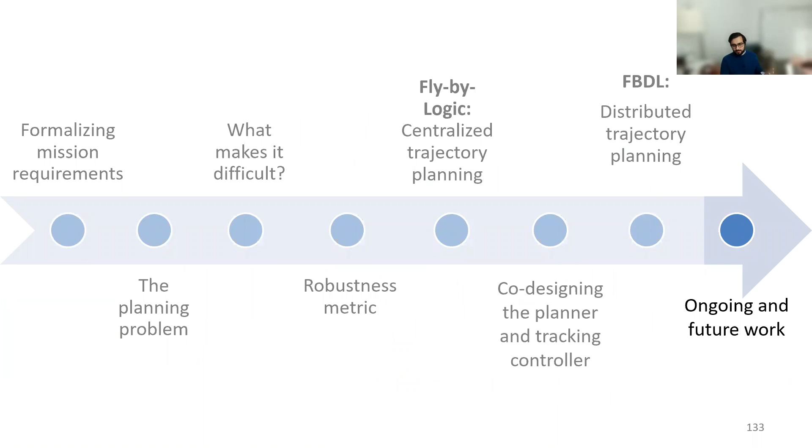Again, I'm going to skip that. I guess I'll conclude by talking about the summary of what we have done in this particular area, and what ongoing and future work is going to look like.

So to summarize, we proposed this Fly-by-Logic—first we proposed a paper called Smooth Operator, which looked at a continuously differentiable version of robustness for metric temporal logic specifications, also with bounded approximation error that enables all of this to happen. Through Fly-by-Logic, we propose a centralized trajectory generation scheme for multi-UAV systems with signal temporal logic objectives. If you want to do all of this with other types of dynamics, you can actually do that for direct dynamic control by using just the smooth robustness function. So it's not just restricted to multi-rotor UAVs, but that's the case when we have the most efficient formulations.

We also came up with a distributed approach called Fly-by Distributed Logic that has some nice convergence guarantees, and again works for the full grammar of STL, allowing you to express a wide variety of requirements.

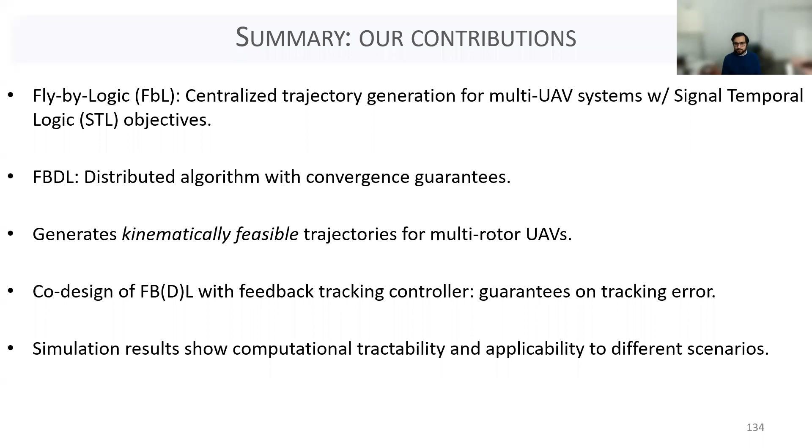Both these methods generate kinematically feasible trajectories. And in fact, through a co-design approach which works with either Fly-by-Logic or the distributed version, we also have guarantees on bounded tracking error through synthesizing feedback controllers. Simulation results and comparisons to other approaches show that the approach does work well. It's computationally fast.

But I should point out this is not a silver bullet. There are a bunch of limitations. The largest, in my opinion, is that these are not complete algorithms. Even if a trajectory exists that will satisfy the STL specification, there is no guarantee our methods will find it, because we're solving a non-convex optimization. One way to mitigate that in practice is by doing a multi-start, having multiple initial guesses of trajectories, then doing gradient-based approaches from those guesses. But that doesn't get around the fact that we do not have completeness.

Another limitation is that the correctness of the generated trajectories depends on knowing the environment perfectly, and all the uncontrolled agents in it being perfectly known a priori. You need to know, from time 0 till the end of your specification horizon, what everyone else in the environment is going to do, which makes this kind of hard to apply in some realistic settings. The convergence issue again ties to point one, that these are not complete algorithms essentially.

The final limitation is that the distributed approach requires a fully connected network and assumes perfect communication. Some of the ongoing work is on overcoming these limitations.

First is to focus on the case where system dynamics are partially known. We're looking at the case where you can come up with a data-driven representation of the part of the system dynamics that you do not know, using Gaussian processes and Bayesian linear regression. Then, how can you still generate plans that satisfy the STL specification with high probability?

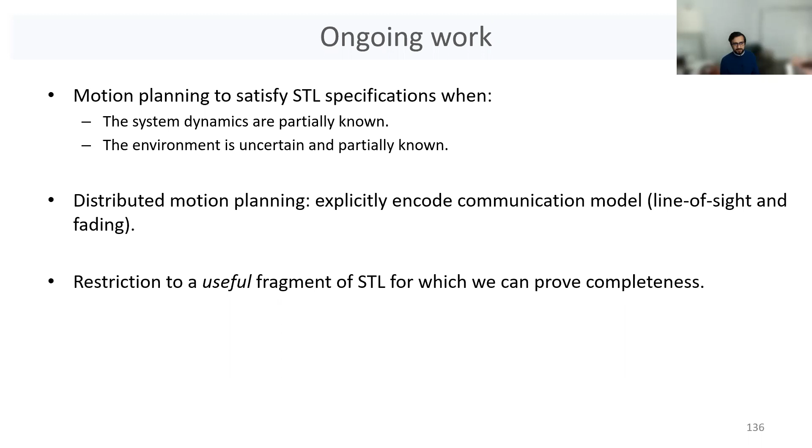Before I conclude, I should say there's a lot of work done by other folks that builds on this, for example finding smooth robustness. People have come up with interesting work also using control barrier functions, combining SAT solvers and optimization, and more recently using graphs of convex sets for controller synthesis, which of course all postdates this work.

So, with that, I'll conclude the presentation. Thank you for your time and attention. If you have any questions, I guess we have a few minutes for that.

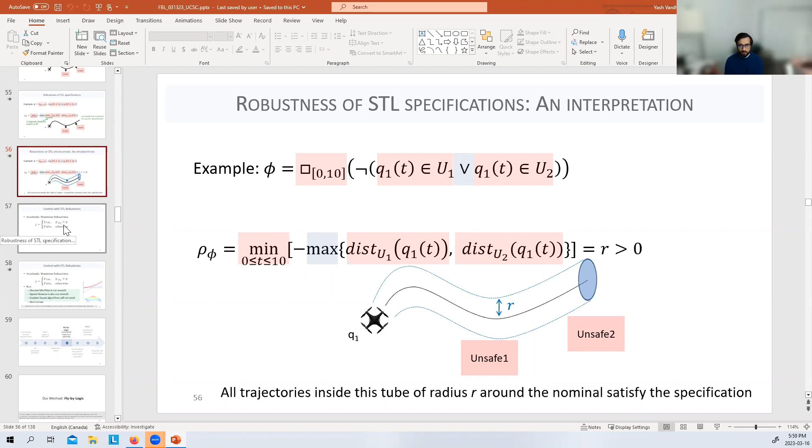Okay, I think I get your question. And I think the key takeaway, which maybe I did not explain very well, is that this robustness is associated with the temporal logic specification itself. So even though I gave you an example where it's just a safety specification, you can think of it as tracking errors being bounded, that's not the only thing this robustness is for.

In fact, for all the examples where we had UAVs, for example, you have this precedence between UAVs where one UAV has to get to a goal set first, or in these type of examples as well, this entire specification has an associated robustness function with it. And it's that robustness that we're trying to maximize.

So it's not just in space, it's not just saying that I want to be very far away from the obstacles. It kind of also means that the robots should satisfy all of these behaviors in the most robust ways. For example, get as deep into the deliver set as possible, or get as deep into zone 1 as possible, essentially hit the middle of these rectangles. So, yeah, the robustness is not just for obstacles, it's for the full specification. I hope that helps the understanding behind it.

I have a question. So, thank you for this talk. It seems like the smooth robustness function seems very similar to a barrier function. Does it act as a barrier function, or is there some distinction?

There is a distinction. The first thing is that the smooth robustness function takes on the full trajectory, whereas barrier functions are usually state-based. So that's, I think, the biggest difference, just in the functional form of it. But of course, people have looked at using barrier functions to generate controllers that satisfy STL specs. But the form they take, I don't know if there's a direct one-to-one relation of that with smooth robustness that I know of. Maybe there is, I'm just not directly aware of it. But an interesting thought, nevertheless.

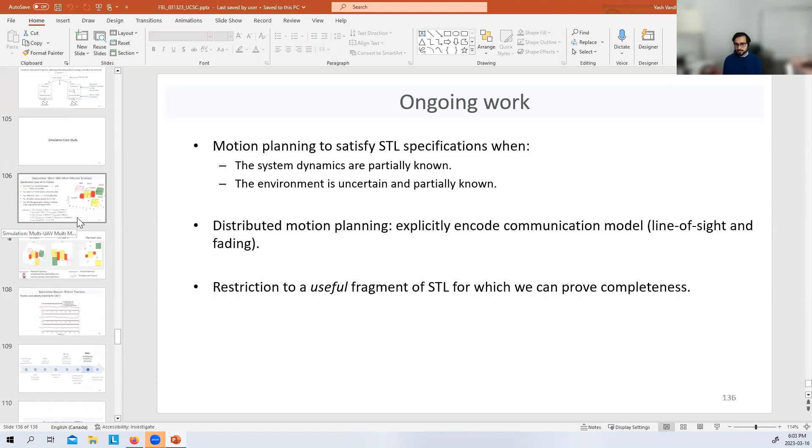I have another question. So for the waypoint generation, is that something that's only done offline, or can you do that in real time as the system progresses? You can do that in real time, subject to your specification not being very complicated, because the more complicated your specification, the harder the optimization. For simple reach-avoid problems, we can definitely do this online. The waypoint problem doesn't need to be solved very quickly, since waypoints are about 1 second apart, so we can run this at like 2 or 3 hertz as an online shrinking horizon optimization, similar to receding horizon MPC. But again, the specification shouldn't be too complicated.

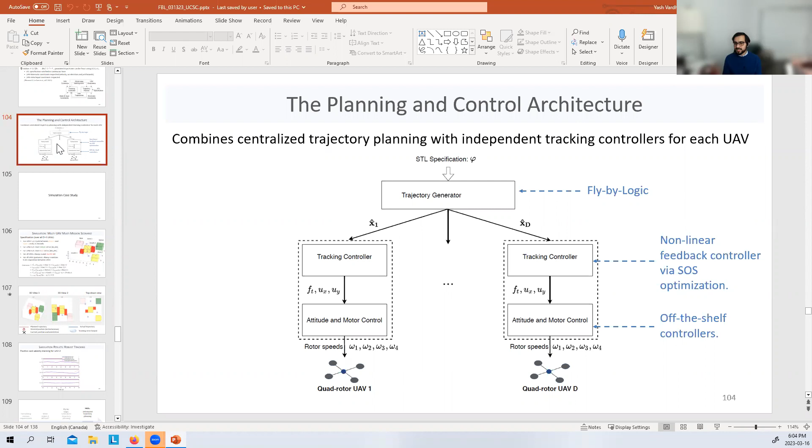I have another question. I want to know, for zone Q1, should the other zones like Q2, Q3, Q4 be considered as unsafe states in the simulation? Oh no, we're doing this planning in a centralized manner, meaning I'm planning for all the drones jointly. My optimization variables are the waypoints for drone 1, drone 2, drone 3, drone 4, and I'm doing this optimization jointly so it satisfies my specification. So I don't need to treat them as unsafe sets, but the underlying specification says that pairwise, all of the drones should be 0.2 meters away from each other always. This turns into part of my non-convex objective through the robustness function.

I'll have one question. In these problems, similar to when you solve problems on a graph, finding the shortest path is well defined, but finding the longest path is less well defined. So I want to ask, in these solutions, I feel there's a problem in principle when the time constraints are very different in magnitude. For example, 3 drones can quickly get to their target, but they have to wait for another one which takes a long time.

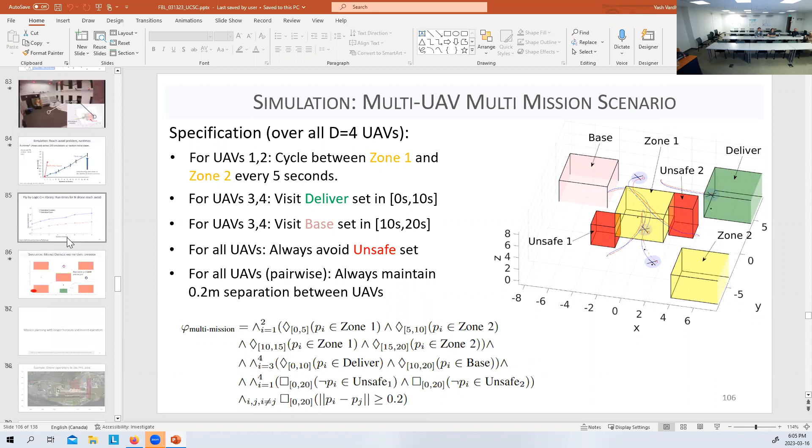While this happens, those 3 drones should somehow hang around somewhere and simultaneously avoid obstacles. In your simulation there's a very good trajectory where one drone does like a needle type of trajectory going there and back. I imagine if it has to wait even more, it would probably do even more going back and forth. So what did you see in your work? How did your solution handle that? Is there some breaking point where you cannot get a solution because of a huge disparity in the time constraints?

That's a very interesting question. I haven't thought about what it would take to break it, since it's a non-convex optimization, I'm sure it wouldn't take a lot. In terms of robustness, having a huge disparity in times, at least numerically, shouldn't be a big problem for gradient-based methods. But one quick fix to generating trajectories like this, which we tried but lose all correctness guarantees after, is to have an objective that is not just maximizing the robustness, but also minimizing some lambda times the path length. If we do that, we end up with very well-behaved trajectories as opposed to these. But then your objective trades off satisfying the STL spec with finding short path lengths, so it doesn't necessarily always find satisfying specs. I did not talk about those results here.

Can, since all your robots move, you have like a stopping state, like you can stop and then handle that way? That's an interesting thought, and I think it would be more feasible in a method that came from the graph-based approach. Approaches that look at this from an automata-based solution might probably incorporate that more naturally. In this case, it's a continuous optimization, so it's very hard to introduce the stop state without introducing integer variables, and that's one thing we really wanted to avoid to make this fast.

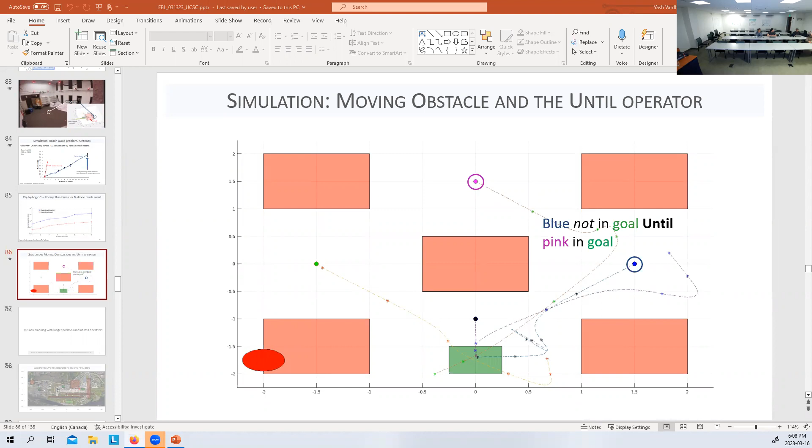It's a very interesting talk. I have more things to ask you, but I'll save that for in person. Awesome, yeah, thank you. Very interesting talk, thank you, Dejan. Thank you everyone again for all the questions and for your time. Okay, well, if that's all, we can then wrap up.